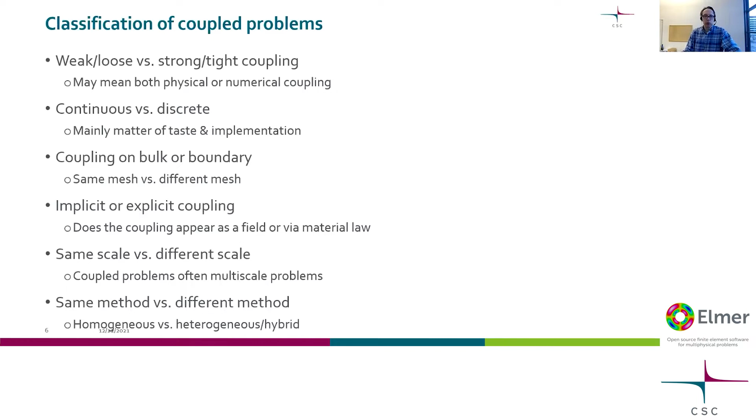And you can have the same method for the different problems or different methods. Sometimes you can call it hybrid methods, or then you can call it heterogeneous versus homogeneous methods. So there are many different aspects how to classify these. And I try to give some examples that illuminate these different words.

As a first example, I take this nice case that we also have in Elmer tutorials. So this is a case where the flow and the heat equations couple. And this is a relatively simple geometry, and the equations are well known. We have a hot inflow coming in, and then it's cooled in this pipe. And if we assume that the material properties are constant, then this is a hierarchical problem. So we first solve for the flow and then for the temperature.

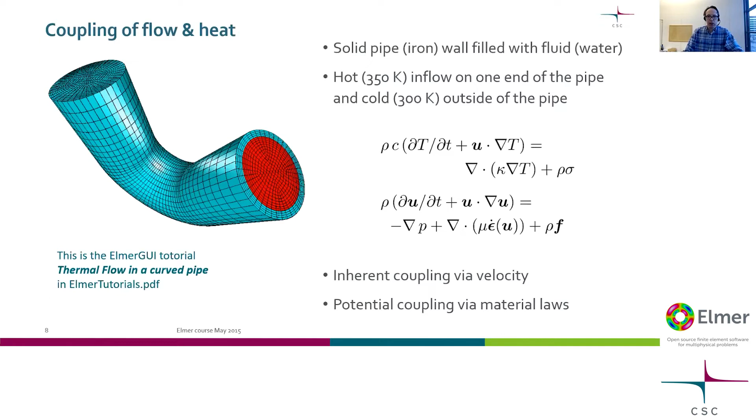So here is the way how the hierarchical coupling is done. So we just make sure that we first compute the Navier-Stokes equation and then compute the heat equation. And if you look at the command file, then you see that, okay, my viscosity is defined to be a constant, and I only take one steady state max iteration, which defines how many iterations you take on the coupled system level.

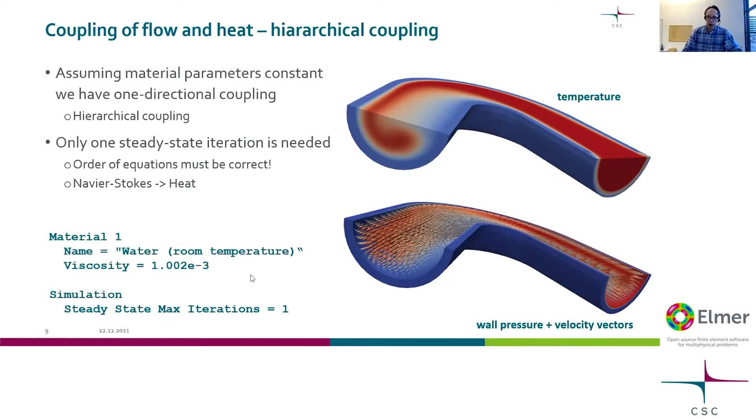Now, you can easily have coupling through some material law. So let's assume that we have a temperature-dependent material law. Here, the temperature-dependent viscosity. I think this is by Thomas, so nice example. So you can, in Elmer, express the temperature-dependent viscosity in many different ways. So you can have a table, MATC, Lua, or a Fortran routine.

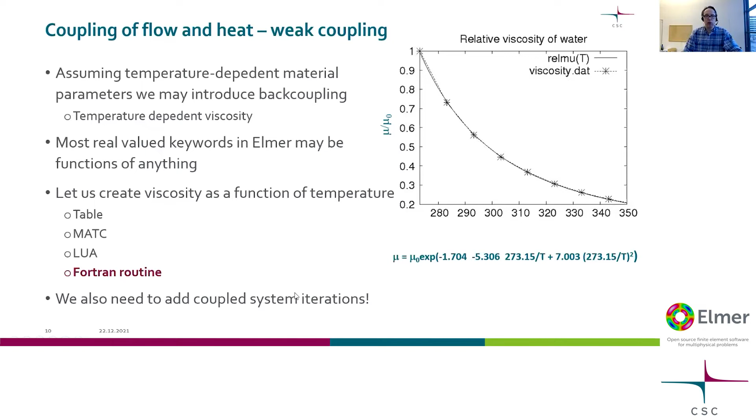So we need to add this functional dependency, in this case we use it as a Fortran routine, and we also need to add some coupled system iterations.

So the differences of these two would be that here in the hierarchical, we just solve once and have constant material properties, and here we need to iterate over the coupled system level. And if you look at the command file, then what changes is that we need to give the viscosity as a function. So here is the simple function for water viscosity. So this computes the water viscosity, and then we need to add some steady state iterations so that we can solve this coupled system.

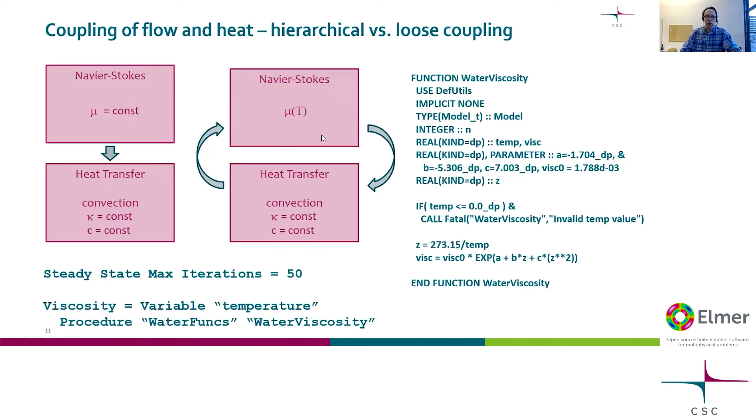And in this case, it's very easy. So this converges very, very quickly. And the effect of viscosity is barely seen. So just a few iterations are needed. And why is it so? I think you can explain it by the driving force is the forced convection. So you have some forced inlet profile coming in, and this is not affected much, even though the viscosity changes. So the forced convection is almost the same, even when you have a little bit different viscosity profile here. So in this kind of case, of course, weak coupling works like a charm.

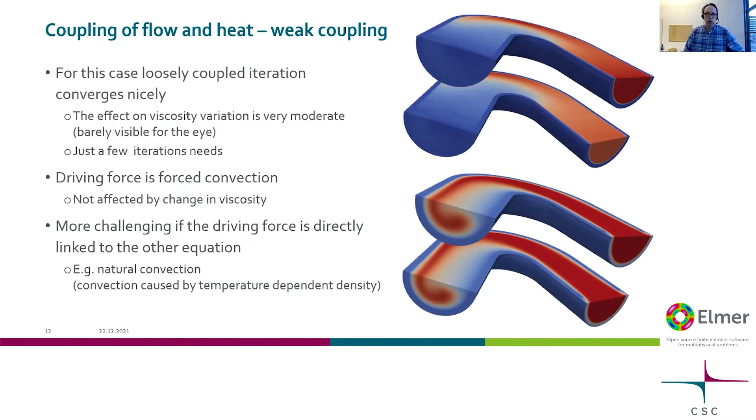So this is a nice schematics by Thomas, how the different iteration levels are nested. So we have an innermost iteration level if we are using an iterative method for the linear system. Then we may have for each equation or each module, we may have additionally nonlinear system iterations. And if these are coupled, then we can have steady state iteration, which basically in transient problem means that we have a steady state iteration within time step.

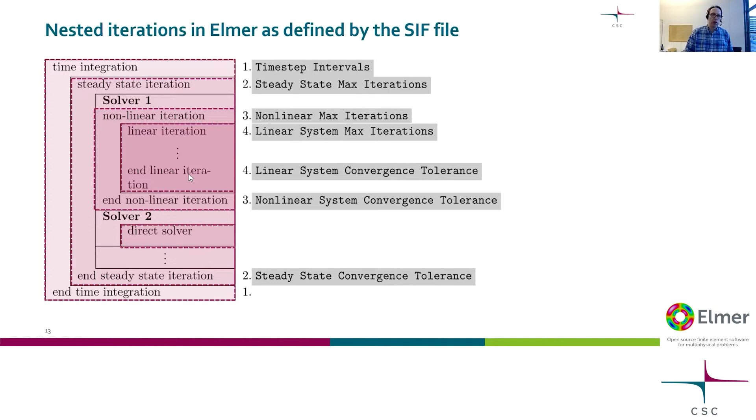So we can choose, if we have time dependent systems, to have one or several iterations on the coupled system level. So do we want to have a fully convergent coupled system or not? Sometimes it's actually even more accurate to take, for the same computation cost, smaller time steps and just use one steady state iteration.

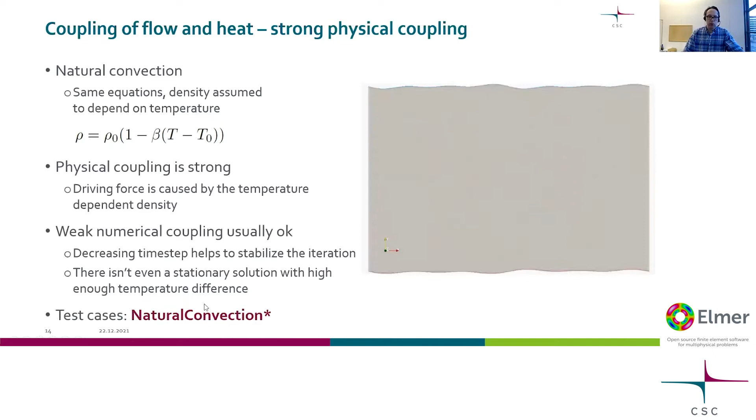And in this kind of case, the numerical coupling is usually okay. So if you decrease the time steps, it helps to stabilize the iteration. So these kind of cases are typically conditionally stable. So if you shorten the time step, you can eventually find a time step that will give you a convergent solution. And actually, if you have a longer time step, there isn't even a stationary solution with high enough temperature difference. So there are test cases in the test suite starting by natural convection if you are interested in these kind of cases.

You can also have even stronger coupling. So one field of problems that we have studied is acoustics, where sometimes you need to model the equations in harmonics. So you basically make a time harmonic ansatz, and you get a little bit different equations, but nevertheless the origin of the equations is the same. So you have a momentum equation, an energy equation, a continuity equation. And when trying to solve these kind of equations coupled, it turns out to be very difficult to get convergence with loose coupling. So we actually need monolithic matrices for this kind of problem.

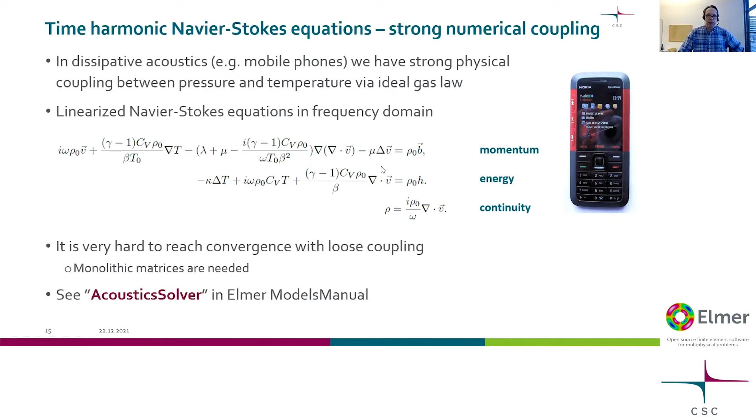And actually for these equations, there is this acoustics solver in Elmer, which builds all these equations as a coupled system. So the downside of this is that the resulting matrix is very, very difficult to solve. So you can maybe find a solution using direct solvers, but eventually if you want to solve bigger problems, you end into problems. And the remedy for that Mikko in our group found was to apply block preconditioning techniques. So you basically make the problem a little bit different, and it's then described by this block system where you can precondition it by the lower block diagonal.

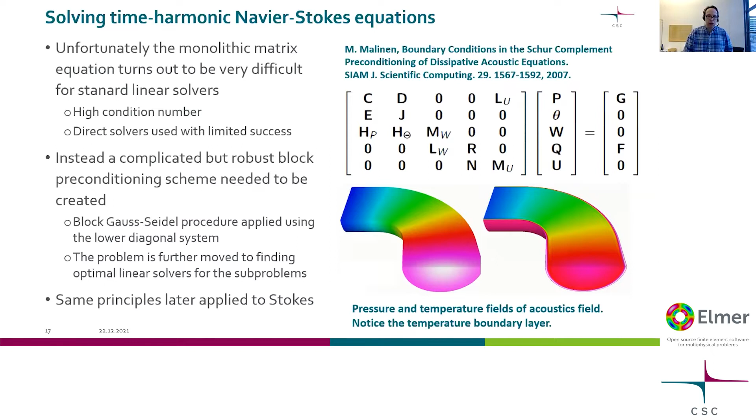So the problem is then further moved to finding optimal solutions for these different subproblems. And these principles were later applied to Stokes' equation, which is monolithic in its own right. So you often have the sort of trouble that if you want to have a monolithic linear system, then you end up having problems in solving that because it may be very ill-conditioned, or you may need to use a lot of iterations for that.

So to give a little bit more insight, I generated a simple prototype problem. So I assumed that you would have problems associated with F and G, and you would try to find a solution for these two equations. F with variables X and Y would be 0, and the same with G.

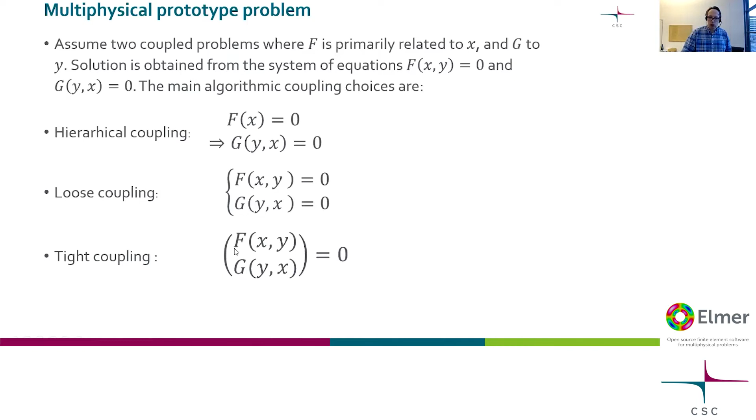So the main algorithms would be the hierarchical coupling, of course, that you first solve the one and continue to the next one. In loose coupling, you go from one to the following and iterate until you are converged, or in tight coupling, you try to solve both at the same time. And how to do the tight coupling?

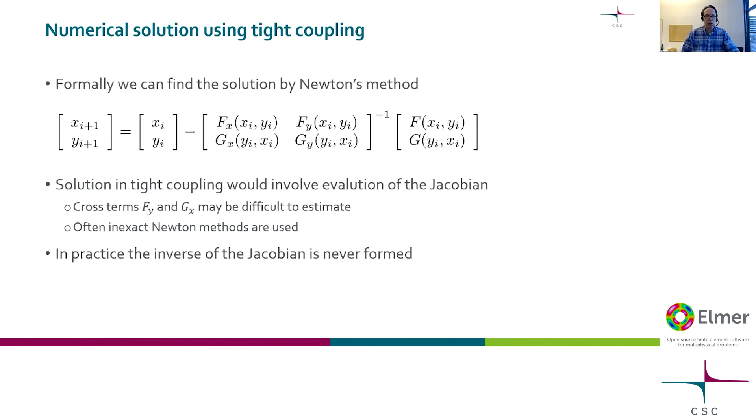So when you apply Newton's method for this kind of coupled system, then you end up having something like this. What is noteworthy is that this, of course, is probably never formed in this way, but when you have a coupled system, then these cross terms may become quite difficult to estimate. But formally, this would be the way to solve tightly coupled problems. And to solve loosely coupled problems, we would apply these equations one by one.

And actually, mathematicians can show that this kind of loose coupling converges if these matrices fulfill this criterion. So basically, what this means is that these diagonal matrices should be dominant compared to the coupling matrices. And of course, this makes a lot of sense.

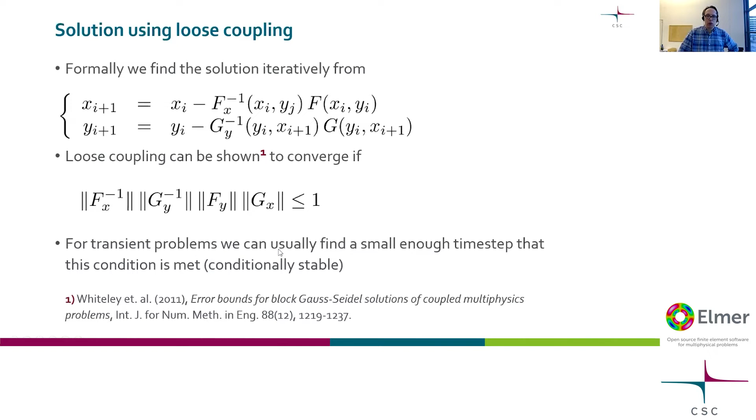When you decrease the time step, you introduce the mass matrix, a bigger and bigger mass matrix, which means that you end up increasing these diagonal blocks, and therefore the system becomes more stable. So that's what is meant by conditional stability.

Okay, let's go to a second class of problems. So we can do fluid structure interaction in Elmer, and there are different ways to do it. So, of course, the natural way is to do this hierarchical coupling. So you first solve for the fluid flow, and then estimate how much force it exerts on the structure, and then compute the structural displacements. And if the structure is rigid, then you actually may just need one iteration. If the structure is more flexible, then you need to iterate, and the iteration method quite often works quite nicely.

In Elmer, you have two ways of setting the boundary conditions. You can use the built-in, coded-in condition FSI-BC, which means that the stress solver knows how to deal with the Navier-Stokes equation internally, or you can use the library functionality to compute the discrete reaction forces, and then have the nodal forces be exactly the reaction forces of the other equation, or actually in this case opposite to the reaction forces. So you have these two different methods, and there are test cases for both of them.

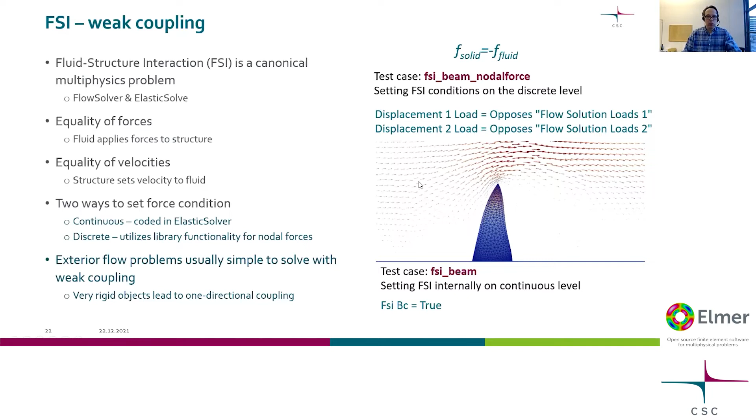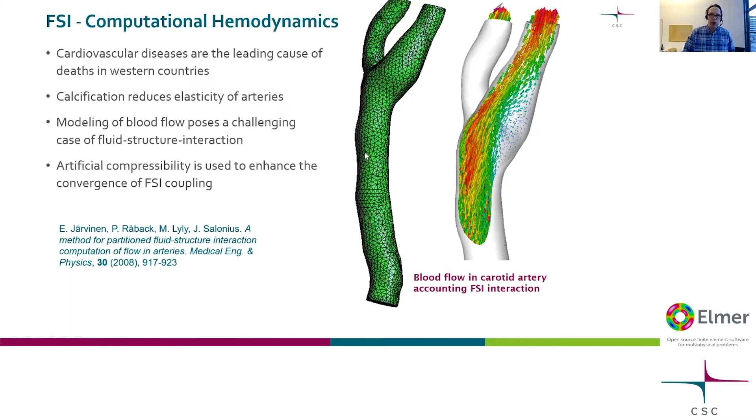Now, this unfortunately does not always work. So the canonical test case where loose coupling does not work is computational hemodynamics, which is a problem involving rather elastic vessels where you have incompressible fluid going in. And so when you try to apply this kind of standard coupling loop, you see that you only get a solution when you have very, very small relaxation factors. So let's say down to maybe 0.01 or something ridiculous.

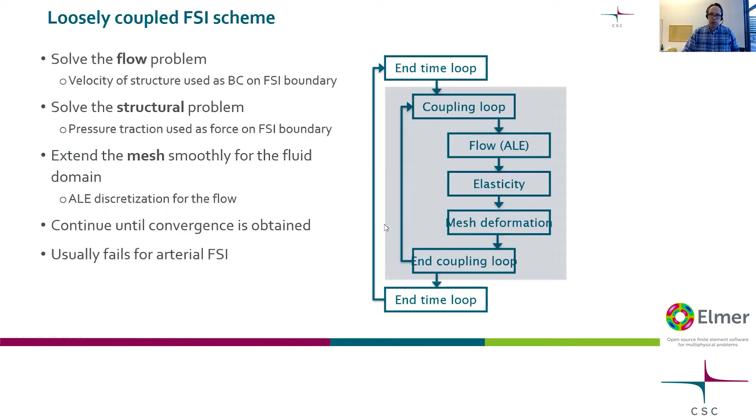And noteworthy here is that you need to solve the Navier-Stokes equation in arbitrary Lagrangian Eulerian formulation, and the moving mesh is solved by a third solver, which is the mesh deformation solver. So this would be the standard loosely coupled scheme. But as said, it has problems here. And why does it have problems?

Well, the main problem is that we have an incompressible Navier-Stokes equation. And then when we try to enforce some inlet boundary condition here, for instance, incoming velocity, while we are solving for the Navier-Stokes equation, the solid is basically fixed. So in the first time step, we have this kind of case where you have all fixed boundaries and just incoming velocity.

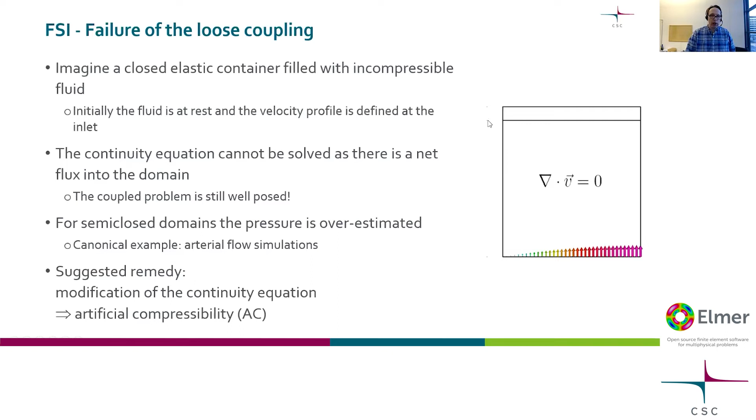And if you look at the equation of the incompressibility constraint and realize that this can only be fulfilled if you basically have infinite pressure, meaning that you cannot have a solution for this because you have incoming net flux to a closed domain. So this fails, but it turns out that we can actually make just a tiny, tiny modification to the continuity

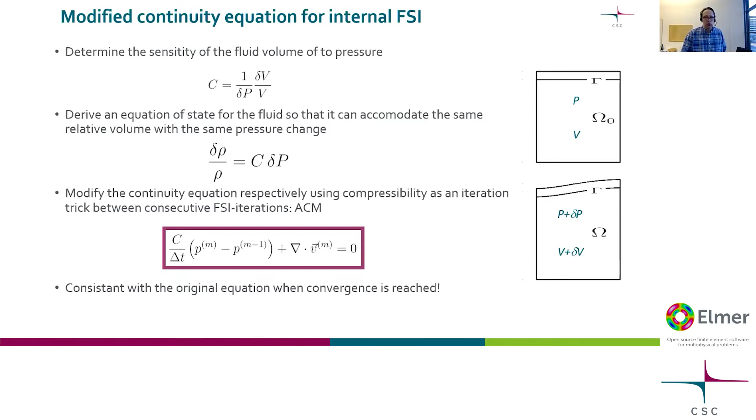equation. So we add something called artificial compressibility, where this artificial compressibility is not a constant, but something that we can compute from the actual case. So basically, the artificial compressibility mimics the elastic behavior of the structure. So when we put in a pressure and have tuned this correctly, actually we don't have to tune it, we can compute it, then the pressure caused by the net flux coming in is quite closely the pressure that would be if we would solve this as a strongly coupled system.

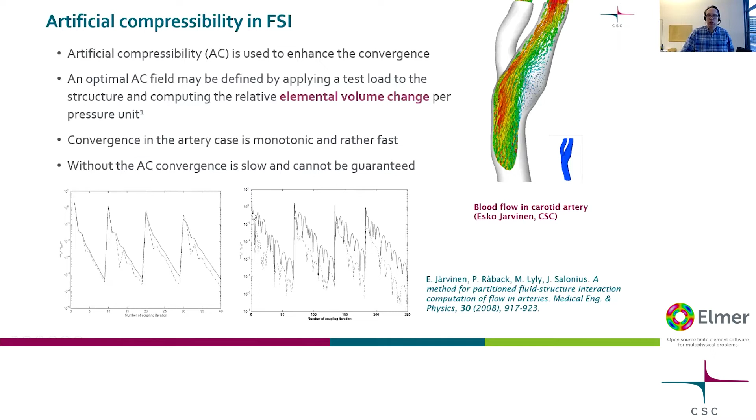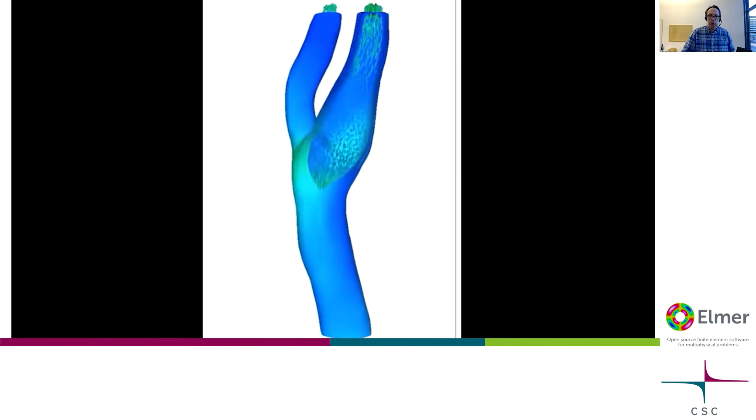So when we apply this simple method to the computational hemodynamic case, you can see that the convergence is monotonic and it's very fast. So you need 7 or 8 iterations for one time step, whereas here you needed maybe 70 iterations for one time step. So with a simple trick, you win, let's say, a factor of 10. We did some animation for this also, but unfortunately, time has not been very friendly for this animation.

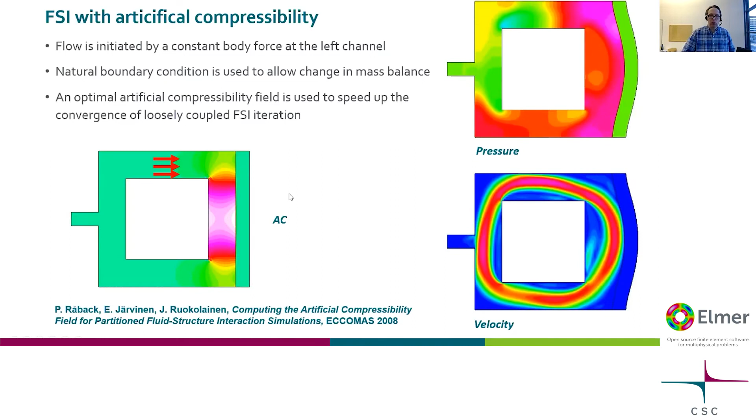And here is another case. This is more like a test case. So we have a sort of ventilation where we can get some fluid in, and then we enforce some rotational fluid here, and we can see that we get nice convergence for this kind of internal flow case.

So this is a case which really needs strong coupling, and there are codes that are specialized in solving that kind of equations. So if this is your FSI problem, then Elmer might not be suitable for that. But there are other strongly coupled problems which can also be solved. For instance, strongly coupled problems in harmonic fluid structure interaction.

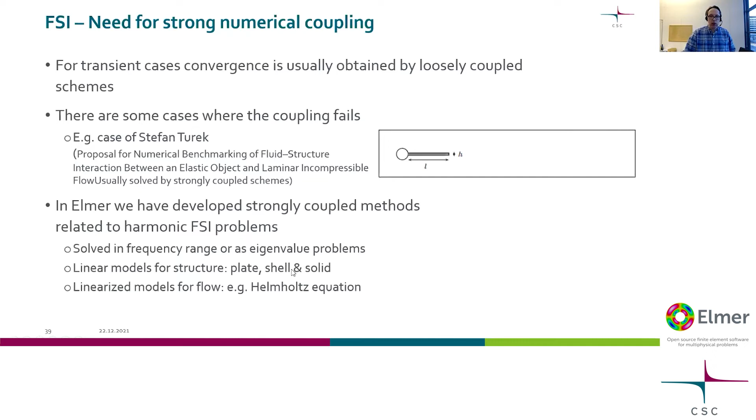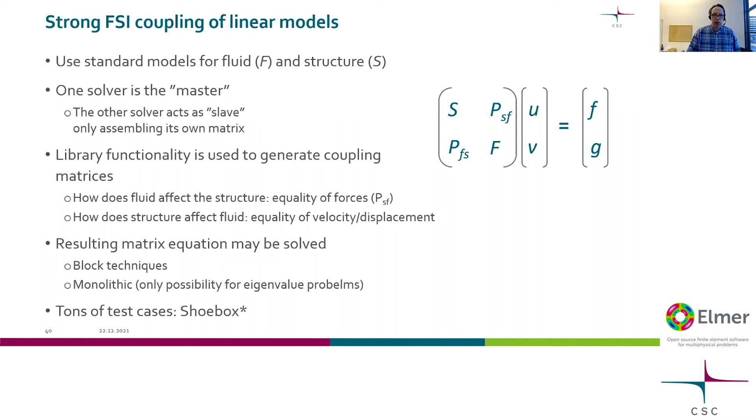And here, for instance, we have tested strong FSI coupling in the case of a shoebox. So assume that you would have this kind of shoebox, and you would tap the box, and you would see that if you are at sea level at one bar, the lowest eigenfrequency would be maybe 105 hertz, and when you go up to 0.1 bar, the frequency changes by a few hertz.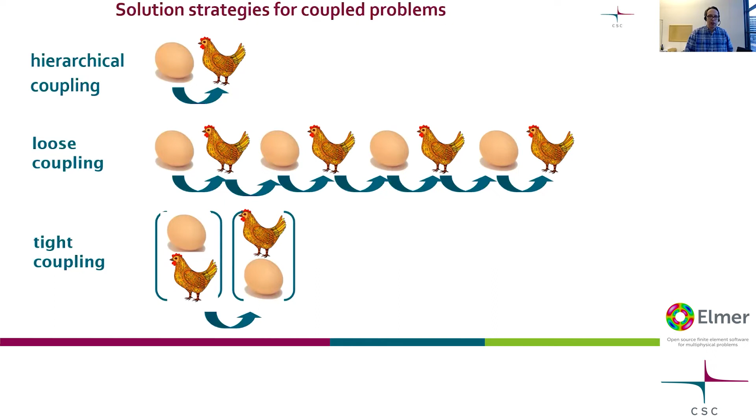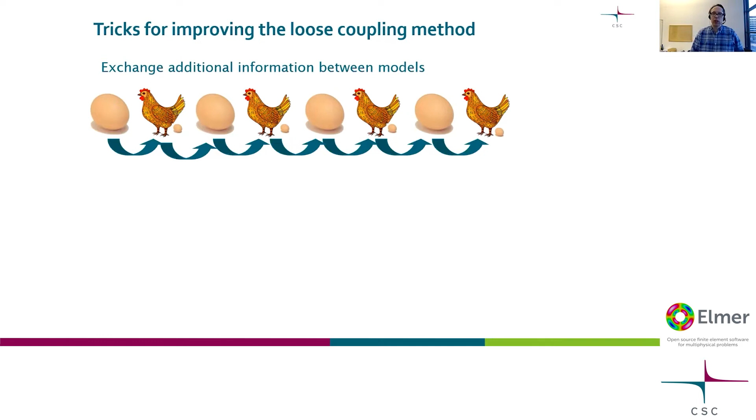And there are tricks how to improve that kind of loose coupling. And this is sort of one way, so you can exchange additional information between the models. So not just go from one model to the next model, but this artificial compressibility basically exchanges a little bit of information between the models so that the models sort of converge faster with this additional information.

And also we have in some cases used this kind of on-the-fly model lumping. So basically make lumped models and then tune the amplitude such that some residual is minimized on the coupled system level. And I don't have an example here, but basically there are modifications of the iteration method. So you don't always need to go to fully coupled methods.

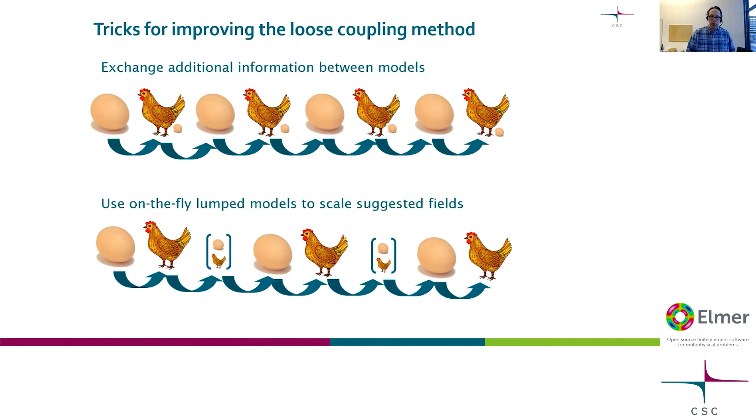I continue with some examples. So here is a fresh example. This is a lithium-ion battery. It's a multiscale problem. So basically you have electrolyte, where you have moving of free charges. So lithium ions go back and forth between the anode and cathode, and you have a Poisson equation for the electrostatics and the transport equation for the concentrations.

The same actually for the solid phase. So the solid phase is associated to each of these solid spheres. Actually, they are just micrometers in size, and you have many of them. So really, really many of them. And in each sphere, you should basically have a 1D model in spherical symmetry, which basically makes this system a multiscale problem.

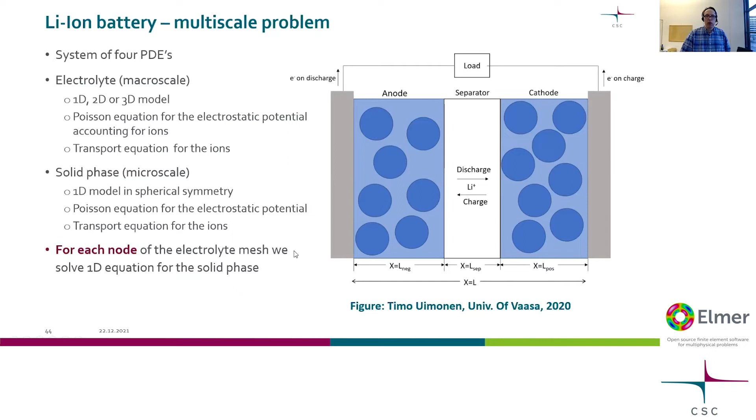So you have a macro scale in order of millimeters or centimeters, and then you have a microscale, which is in order of maybe tens of micrometers. And both have two different equations. So you have basically 4 different equations that are coupled. And this is actually quite a computationally costly problem, because in each node of the macro scale, you have a microscale finite element mesh embedded.

And to make things worse, the two potentials associated to the electrostatics of the electrolyte and the solid phase are associated with the hideously nonlinear Butler-Volmer equation, which is of this type, and you can see that you have some potential equation here, which pretty much makes any hope of having some kind of simplifications sort of unfeasible.

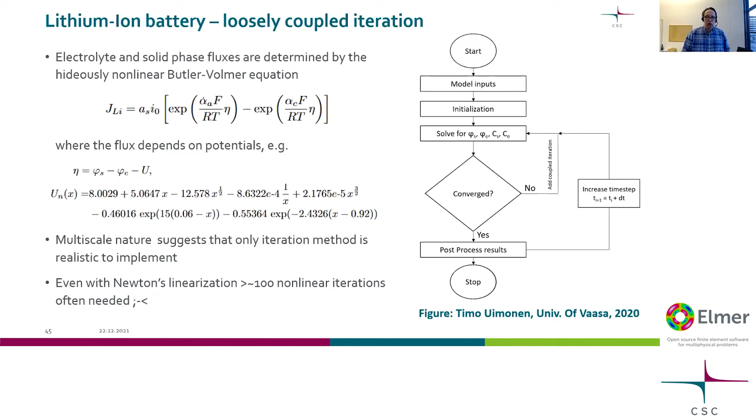Also, in each node we have hidden a sort of 1D problem, and each 1D problem is individual. So really we cannot solve these problems at the same time. So the iteration method is the only realistic method to implement. And actually for this kind of case, even with Newton's linearization of this hideously nonlinear Butler-Volmer equation, you need easily hundreds of iterations. And this is not a peculiarity of Elmer; also in implementations in literature, you find this.

Coupling of finite elements and particles. So this is also a sort of coupling that you might want to do. It's basically an example of heterogeneous models, so you have different models being coupled. And finite elements has its strengths, which are related to, for instance, genericity in geometry. And they excel, for instance, for elliptic equations. But pure transport problems are more challenging.

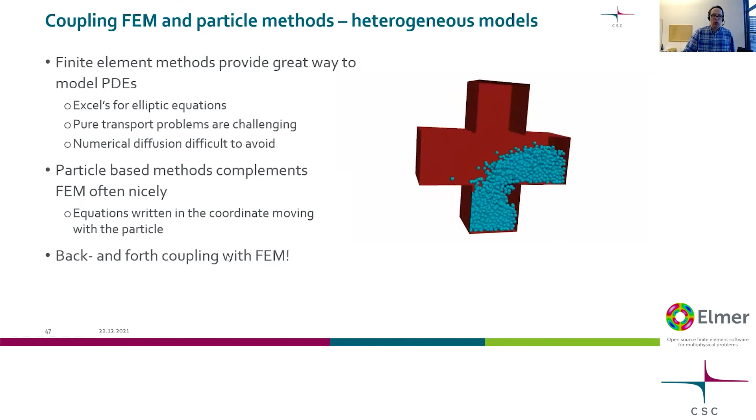Of course, particle-based methods have their own strengths. One is, for instance, that equations are written in the coordinate of the moving particle. And this means that in that frame, there is no diffusion of any kind. So this may be a nice method to complement the feature set of finite element methods. And of course, you may need some back and forth coupling between the two methods.

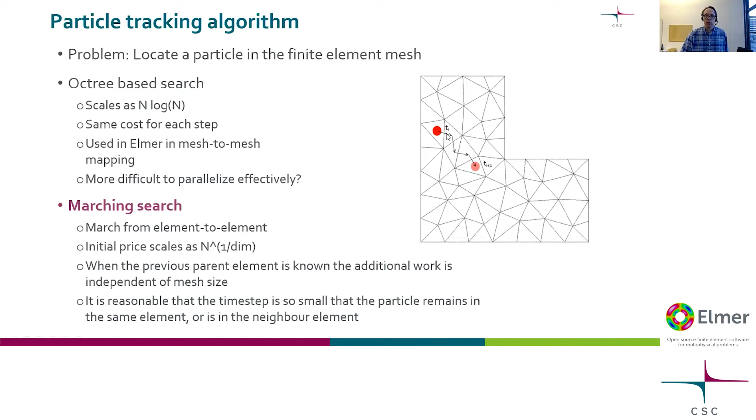The particle tracker of Elmer is not very cheap because it follows the particles in an unstructured mesh. So basically, we need to have topological information on the mesh, and we know, okay, if my particle goes over a face, into which element does it appear in? And this is quite economical if we take short steps, but not so economical if we take longer steps. So this is not competing with other particle codes, but it's a nice method if you take short steps with the particles and don't have an excess amount of particles.

So this ParticleAdvector, what it does, it basically looks at each node and sends particles backward in time until they meet the origin where they then read their value. And this kind of technique does not introduce any diffusion, and it may be nice to use this kind of solver to study some advection type of phenomena, like you could advect even time or other passive scalars.

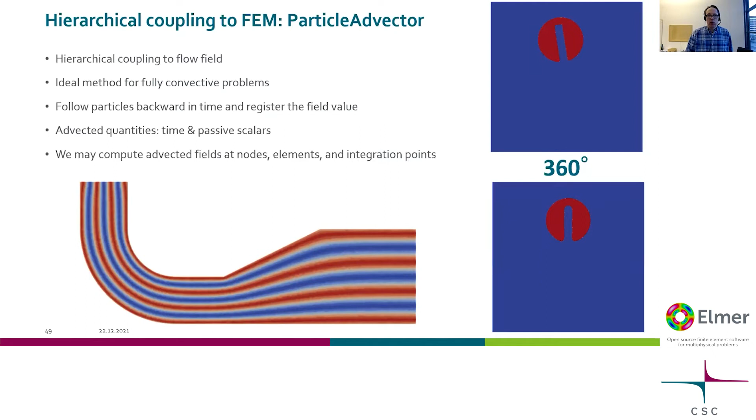So here is an example of the Navier-Stokes glacier by Thomas and company. So we applied this to that case, and you can follow the flow and inherit, for instance, from the place the particle started. For instance, you can find the distance traveled. You can find what was the initial height where the particle started, etc.

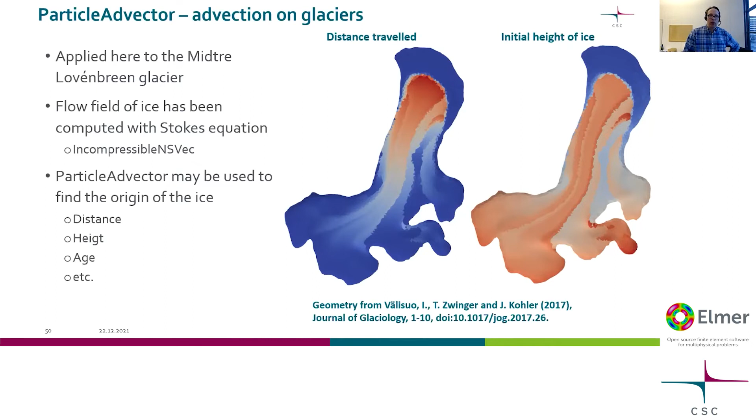So this may be very interesting if you have a steady state case of a glacier and you want to know where the heck did this piece of ice come from? And of course, this is just one example, but this solver can be used for many other types of problems as well.

There is also the possibility to have bidirectional coupling involving particles. So the particle dynamics can do this. It knows how the fields in the mesh can affect the particles. For instance, the particle knows its position in the mesh, and in that exact position, you can estimate any field using the basis functions. So it's not just a constant value in that element, but it's really approximated using the basis functions.

So you can compute forces, for instance, electrostatic or magnetic forces or fields, and you can compute viscous drag, etc. And also the particles can contribute to material properties or source terms of the partial differential equations. So for instance, you could have carriers of property. If you have several types of particles, you can carry some property with them, and then you can see, okay, what's my fraction of particle A of all particles, and then the property depends on the particle fractions. Or the particles may be sources for electric charge, heat, or whatever.

So, the contribution is not just given to the closest node, but it's given to all the nodes that are in the element where the particle resides. There are many names for this kind of method. Particle in cell, for instance, or material point method, etc. So I think it's not so well settled a field as, for instance, the finite element field.

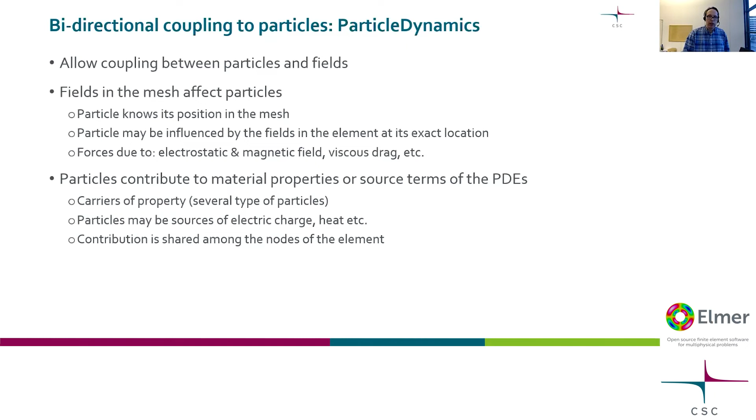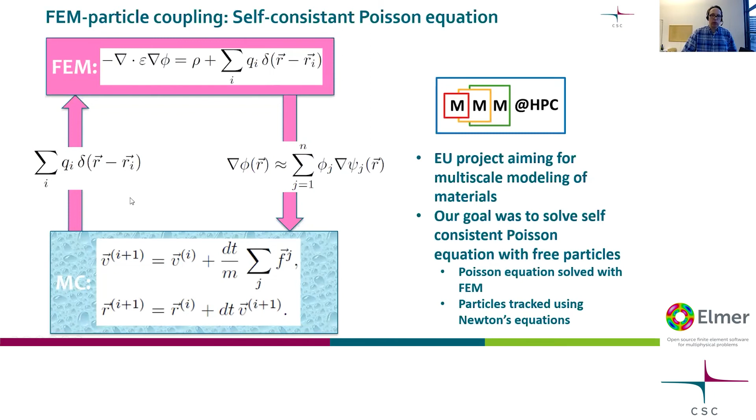So here is an example of a self-consistent Poisson equation. We have an equation where we have fixed sources. So this is a fixed charge density, and then we have moving charge density. This is associated to the moving particles, which obey Newton's laws. And you basically can first solve the Poisson equation for electrostatics, compute the forces affecting the particles, and then compute the new positions for the particles, and then their contribution to the Poisson equation on the right-hand side, etc. And continue this until this is consistent.

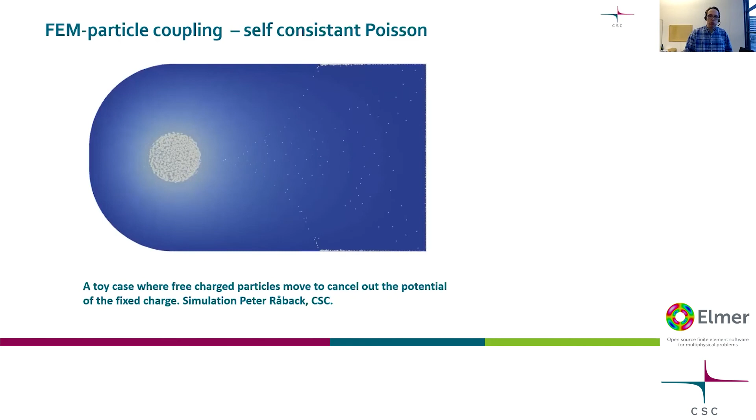So here is an example where I initially had a background charge density of -1, and I know that these particles should go and cancel the -1 with their total +1 charge. And indeed they go there. It must be said that the physicists have their own codes that are dedicated to this kind of problem. So this is more like a demonstration.

And here is another kind of demonstration of the particle dynamics. So here we have two types of particles.

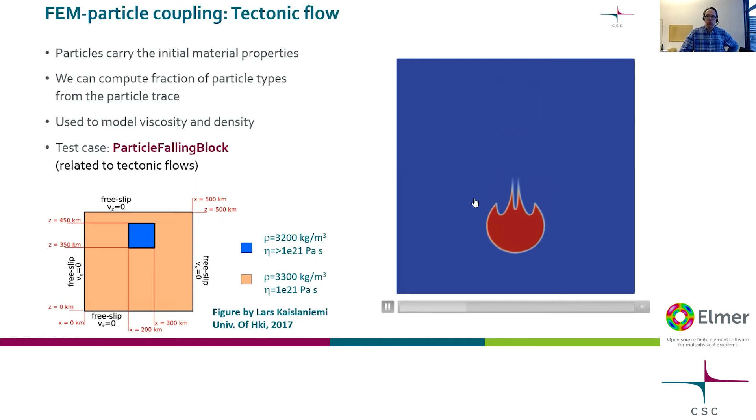Particle A is this square here, the smaller square, and it has a little bit smaller, I think these are the wrong way around. It should have a little bit higher density. And it basically goes down in this lower density fluid that surrounds it.

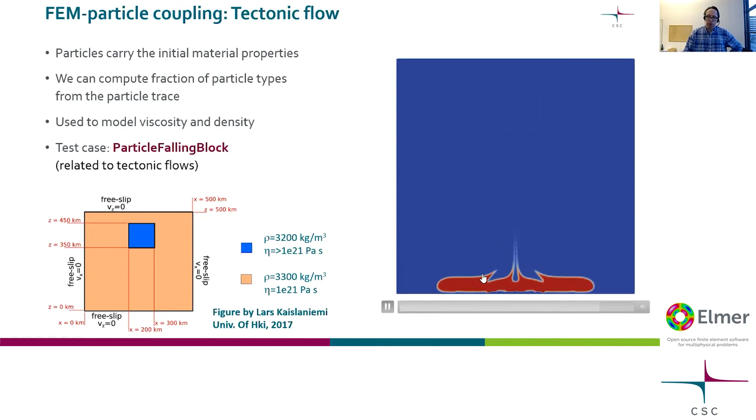And you can see that when you follow the particles, this is now the particle fraction, you can get features that you could not get simply with the finite element solution, because you have these tails, for instance, that would diffuse away if you would have the same number of finite element cells that you have now particles. So there are some fields where this can be of interest.

So here actually you see the particles. I didn't plot the other particles, but of course you have the other particle type surrounding here. But there are problems. For instance, one problem is that these particles will eventually not be uniformly distributed. So you get these kinds of places where you don't have many particles, and then you cannot so accurately estimate the material properties of the particles.

So again, here we can basically demonstrate nice sort of coupling. But if you have tons of particles, then there are dedicated codes that follow these particles in a more economical way. But Elmer particle features are good if you have particles in the same number as you would have, for instance, Gaussian integration points. If you need so many particles that their statistical noise is vanishing, then maybe some other codes do a better job.

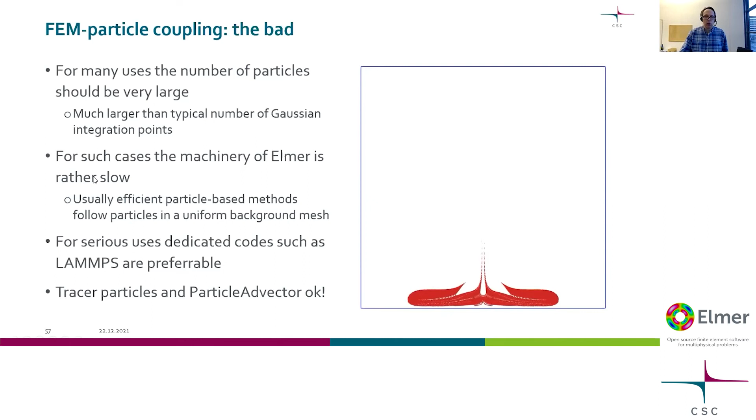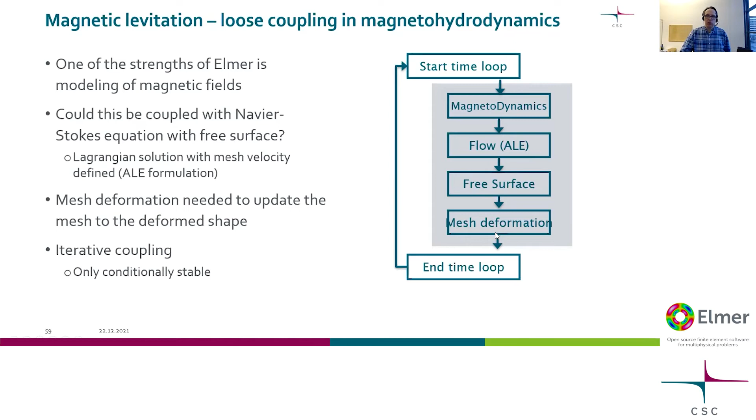Finally, I have an example of magnetic levitation. So this was a case that came up on the forum some weeks ago. I followed it a little bit, and then I thought that, okay, maybe I try to solve it before this webinar, so we get a nice case for the webinar. But actually, it wasn't so easy a case. So this is a problem where you involve Maxwell's equations, Navier-Stokes equations, a free surface, and a mesh deformation. And you try to find a sort of convergent solution for this.

And this test case was suggested by Roland Ernst on the discussion forum, so you can find some discussion on the EM levitation topic in the Elmer discussion forum. So in principle, we have all the needed features. So we have here a ball, and then we have some inductors in different directions. So basically, we have current density that generates a magnetic field, and the magnetic field generates currents in the liquid metal, and the currents then generate the electromagnetic forces and make the

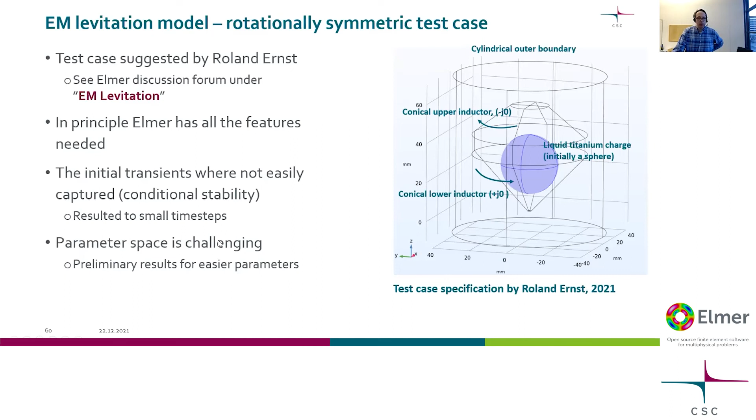sphere levitate. The parameter space is pretty challenging, so these are preliminary results with easier parameters. So even though we knew that this is a little bit tuned so that the gravity and the electromagnetic forces are roughly in the right ballpark, even then the initial transients are rather demanding, because you need to have very, very small time steps in order to capture these initial phenomena here. So this is also very much conditionally stable. So you need to have here a very small time step.

And in this kind of case where you have mesh deformation, if you end up having too much deformation, then the mesh will be so deformed that you cannot compute anything with it anymore. So that's the one challenge. So luckily, there is a nice solution for this. You can couple Elmer with OpenFOAM. Juris Vencels has created a nice Elmer OpenFOAM library that combines these two codes in a very nice way. And OpenFOAM has some Eulerian methods that are more robust for this kind of coupled problems.

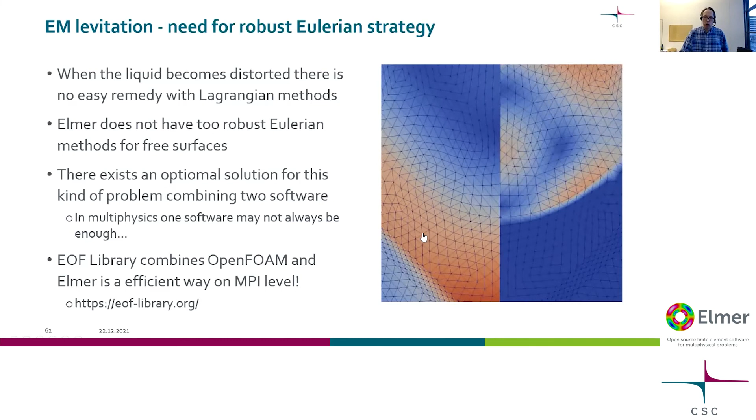Okay, maybe a little bit of comparison between our experiences in loose and tight coupling. So we mainly use these loose coupling, or segregated, or weak coupling methods. Unfortunately, if you have a very strong physical coupling, these do not always converge. The plus side is that it's very easy to utilize existing solvers for individual problems. So you can just take the different solvers out of the box, and in Elmer you have features that enable you to couple them out of the box. You don't usually need to code anything on the interfaces, etc. And you don't need to estimate the difficult coupling terms, for instance.

And the resulting individual matrices, they are more easily solved by optimal methods. For instance, if you have Poisson equations coupled, then you can use multigrid methods for the individual equations, etc. And these are using memory more efficiently.

Then, on the other hand, you have tightly coupled methods, or monolithic, or whatever name you want to use. They are more robust in the whole parameter space. The reuse of existing solvers is often a little bit more difficult. You have to estimate somehow the coupling in order to take use of the strong coupling methods.

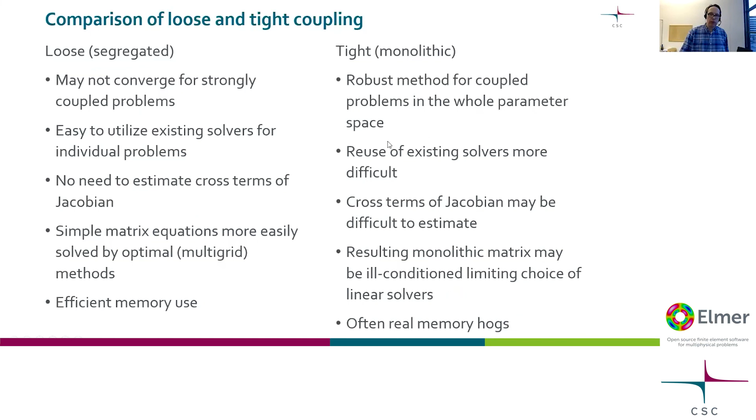Well, the challenge here was that our free surface solver that, for instance, Thomas knows very well, which has been mainly applied to crystal growth and then later to computational glaciology, assumes that it is mappable to a plane. If it's 2D, you have a principal direction, so in this case it would be only a function of x. And in 3D, it would be only a function of x and y, and you would compute the height. The problem in this case is that we cannot use that because it is not capable of dealing with the local coordinate system.

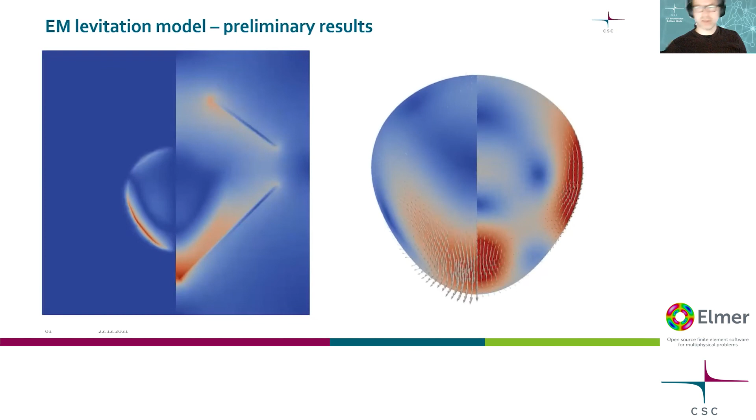I don't see any further questions. May I ask a question concerning the slide you have on now? Is it possible to include also surface tension in that problem? Surface tension is there already. Yeah, okay. Sorry that I missed it. Yeah, I probably didn't even say that. So there is surface tension, and actually, I don't know how much it affects the system, but I think it helps to settle it, because this looks rather nicely spherical. So I think that it has a significant effect on the solution.